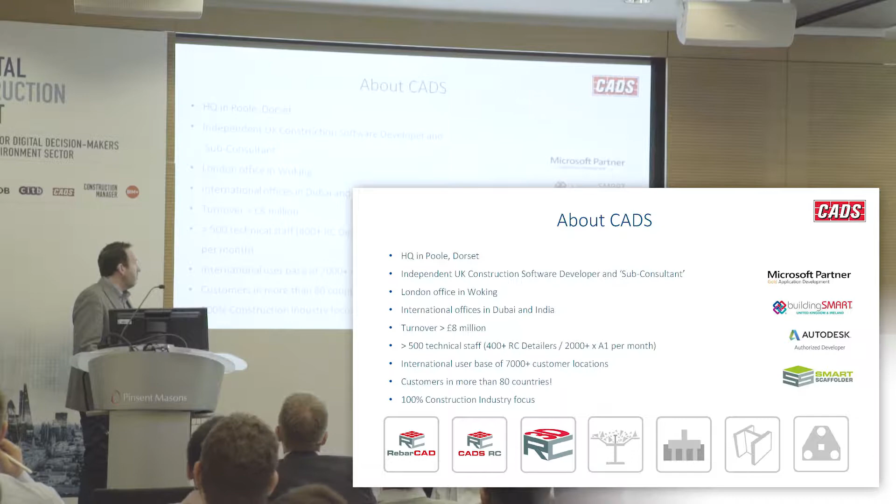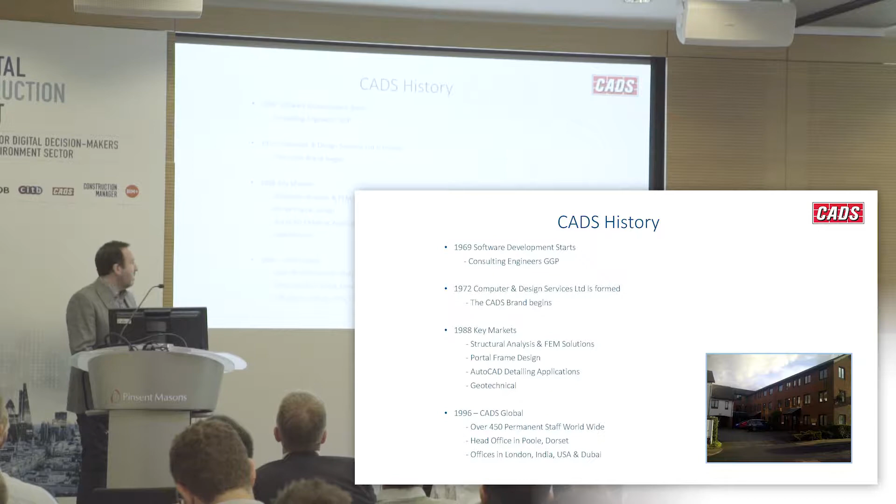We started in 1969. In 1996, we went global, so we've got offices in London, India, USA and Dubai. USA is one of our biggest areas as well.

Software solutions - we started off as a software provider, so a lot of these things are for engineering, civil and structural use. SMART Engineer is like a desktop calculation package for individual designs. A3D MAX does 3D analysis, first order, second order analysis, P-Delta, and a lot of other tools that we look at.

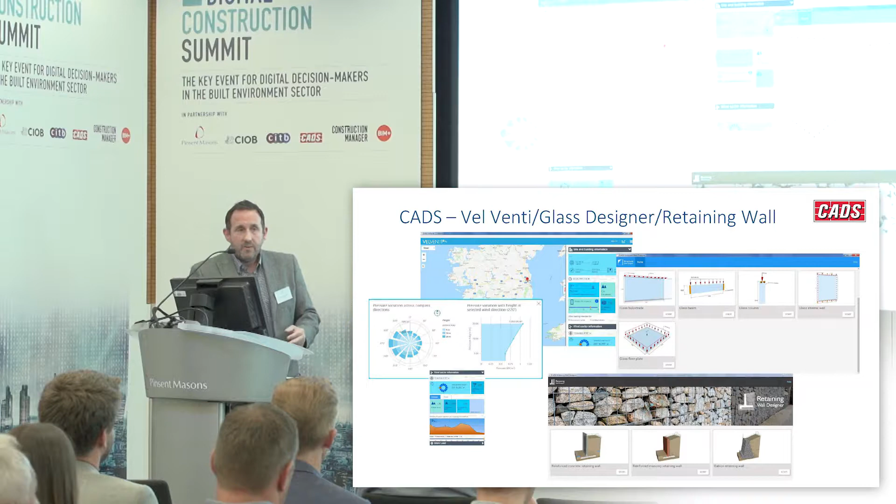We're even moving into more app-based products now, so we're continuing to develop apps. We've got retaining wall designers, glass designer, a new Vel Venti wind designer. So we're actually still advancing our offerings for the market.

We work with a lot of manufacturers - you can see we've got a few there that link into our products. Again, the emphasis for us is to make sure that in a digital environment we're including these people and getting that information into our products.

We also have partnerships, which is very critical for digital construction. The one partnership we've got at the moment is with Dlubal - sorry, I can't even say it. The idea, especially with digital engineering, is linking BIM models to analysis. You run analysis models and the information comes back into the BIM model. We've spoken about this disjointed method today, where a BIM model and something else come in separately. Now analytical models are being linked into Revit models, so all the information's in one place. We're even coming up with solutions to work within that BIM model for structural engineering.

This covers timber frames, CLT panels, glass and aluminium design. So everything you can design can be put into this platform, then transferred into a BIM model. These partnerships are critical for us.

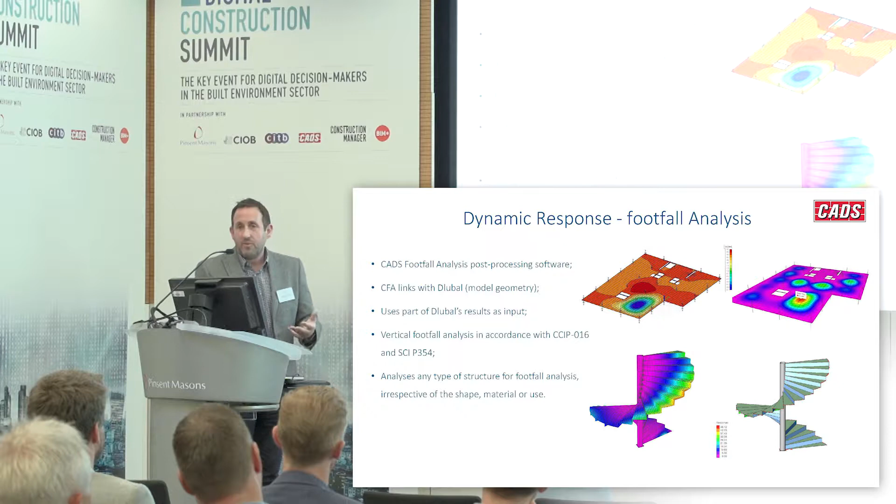Nonlinear analysis might be lost on a lot of people. One big thing here is CADS' footfall analysis. We're even developing things now to add into these third-party packages. We specialise in this, so we've said, look, you can use this in your own work. Footfall is becoming more critical now, even for things such as stairs, so designing for footfall analysis.

It used to be just for bridges, but now it's coming into hospitals too - it's becoming more about response factors. Again, a lot of standard products and projects you can work with, FE analysis and these sorts of things. One of the main products for CADS is CADS RC.

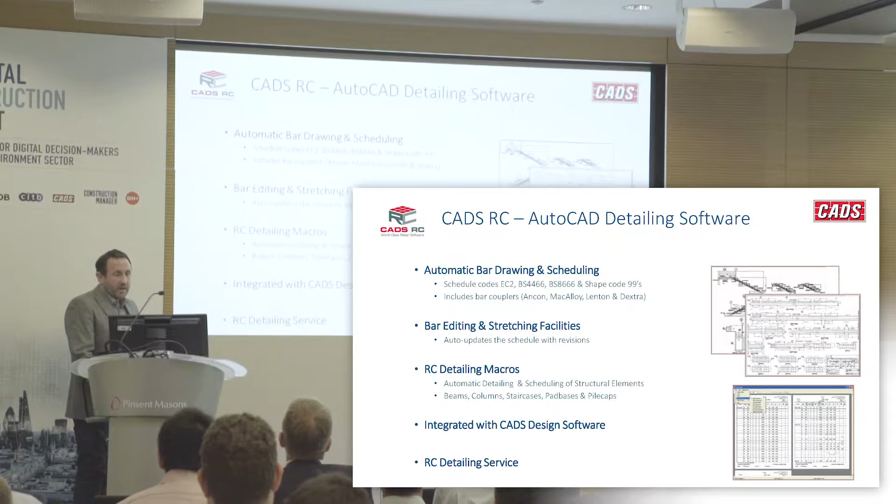This is an AutoCAD-based platform, and what this really did was take 2D drawing to the next level. AutoCAD's great - the best thing about AutoCAD is you can draw anything. The worst thing about AutoCAD is you can draw anything. So the idea was to start putting macros into the drawing environment with design parameters, but the idea is to pull information out. We can even start to design to codes within AutoCAD.

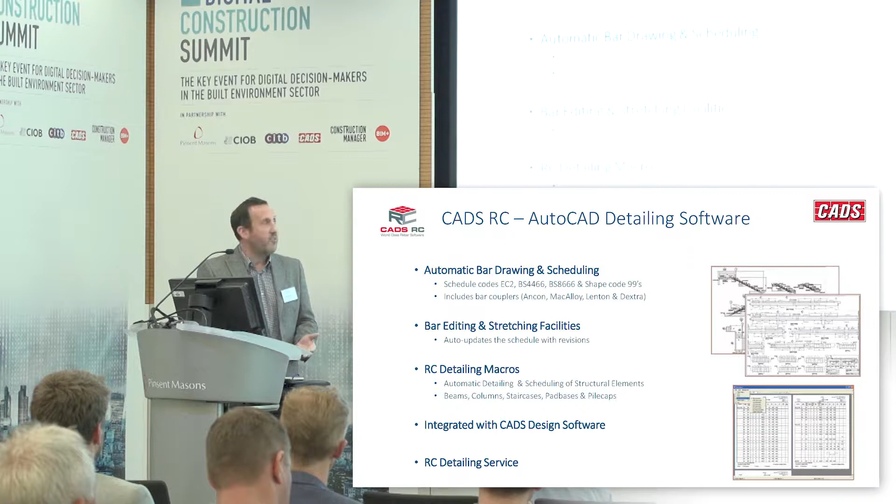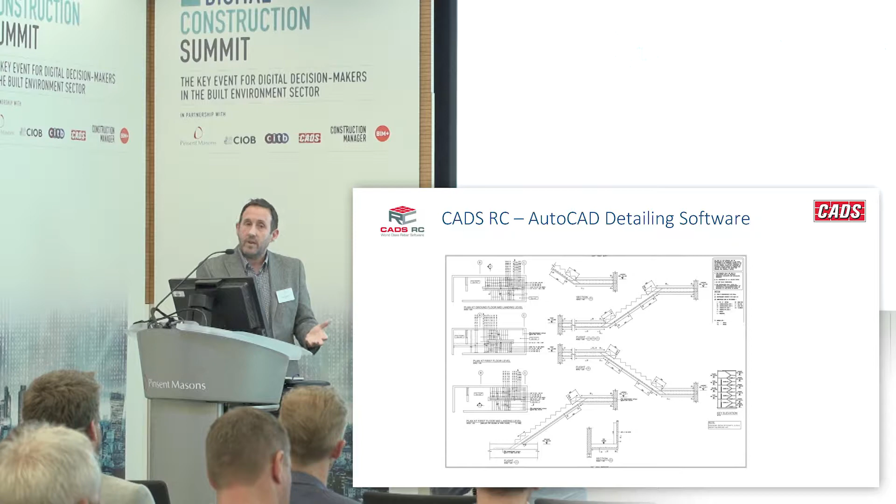AutoCAD isn't intelligent - a line's just got a length, after that it's got a line style. So by building these macros into the software, and with all this information, it allowed us to drive forward. These are the sort of drawings you can produce - automated drawings. You move something here, the schedule updates. This is in AutoCAD, so again it's this automated processing that a lot of BIM requires.

We've even now moved on to CADS RC 3D for Revit, so again we're bringing that technology, that information and that process into a 3D environment.

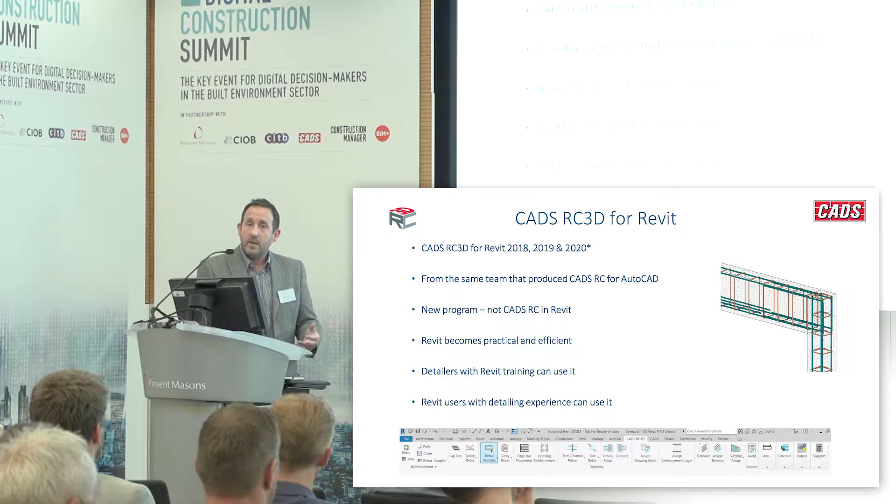Now, the idea of this isn't new to Revit. Revit can put reinforcement in, but if you ask a lot of people in the industry, do you use Revit for reinforcement? They'll say no. I say, why? It's just because it doesn't give us the tools we need. So what we've done is provide the tools you need to come up with solutions.

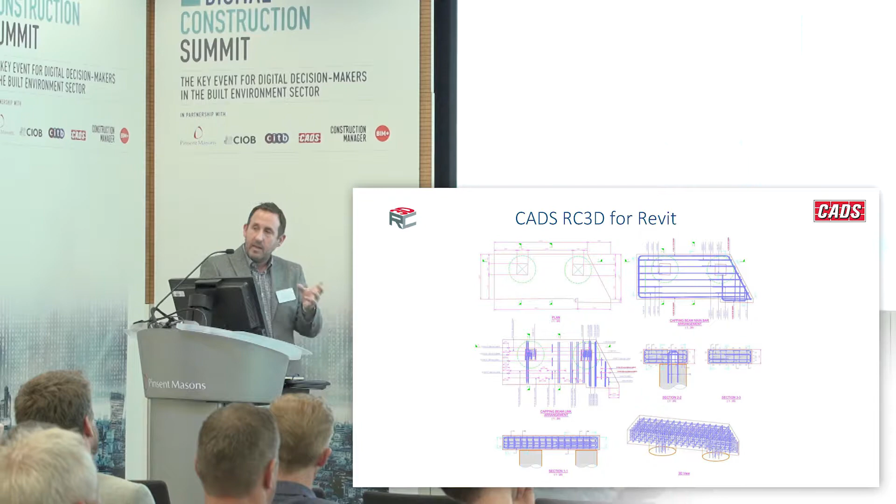And again, as you can see, standard BIM model, these are the sort of things that we were talking about earlier with Alistair and linking into BIM projects and all these sorts of things. But one of the main things we do is outsourcing. Clients will come to us. We've got a lot of big clients who are working on a lot of big projects in London, and they will come to us and say, we're working on a BIM project now. We used to use you for 2D drawings, but now we're taking the step into BIM. Can you provide us with this?

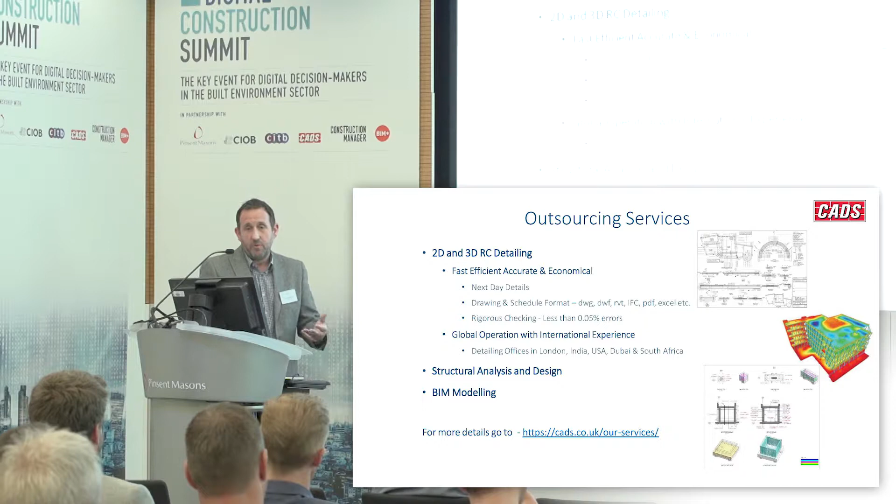So as a company, we've had to evolve and develop new ways of working to actually meet our client demand. So my standpoint today is really coming from a third-party standpoint. What have we had to do differently to meet digital construction, DfMA? So it's these sorts of things.

Reinforced concrete is obviously 2D design, and it says there 78% still produce 2D drawings. Problem with a 2D drawing, if you're not using CADS RC, is it's just a line. You can't get any information from it. BIM is about the I, it's information. What information is involved in that rebar?

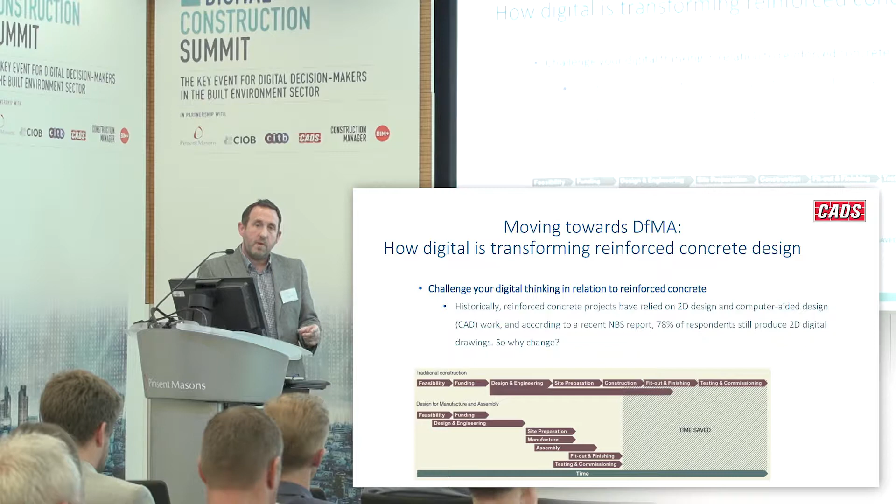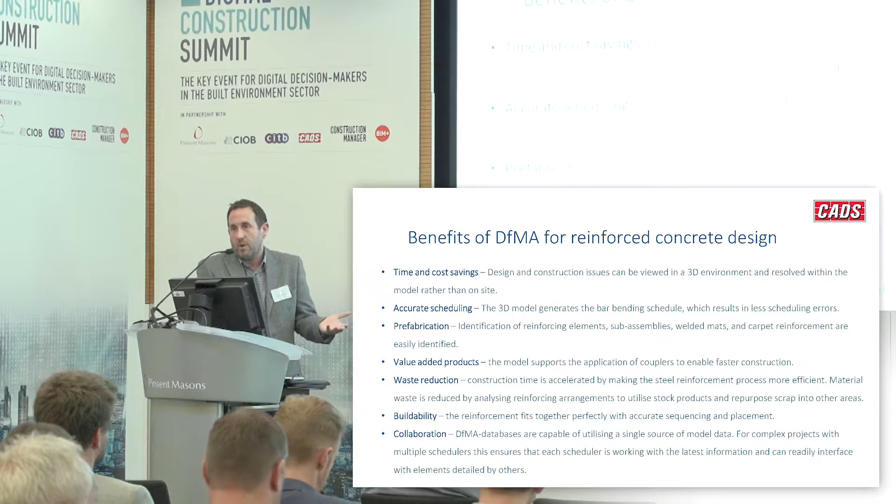Prefabrication, again, we'll show this in a minute. Value added products, so we can actually include manufacturers' couplers into the product to enable connections quicker on site. And waste reduction, a bit of a difficult one there, but with waste reduction, the idea is to cut steel if you're cutting on site and use it elsewhere. So again, you wouldn't know otherwise. You just have to take a guess at it.

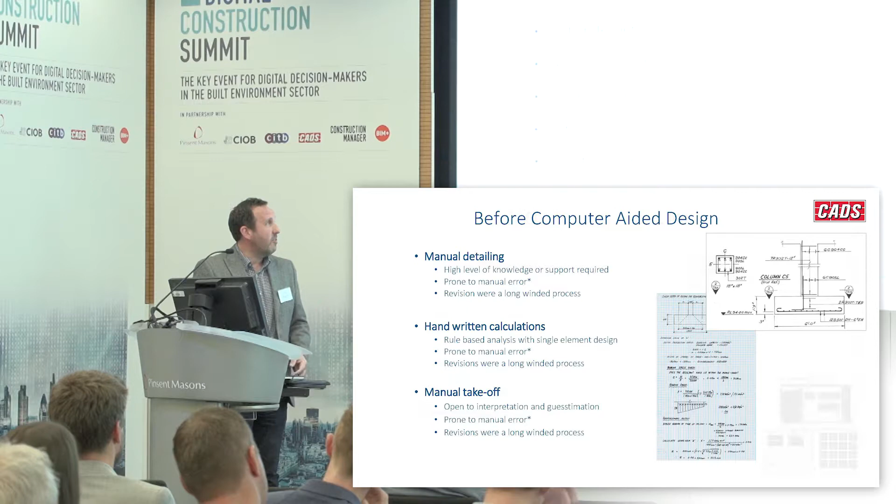So before computer-aided design, we have manual detailing. Now I've just put a little asterisk next to these, prone to manual error if you're doing standard drawing, and the reason for it is the argument that, and probably many of you never drew on a drawing board, if you did, you probably took more time on a drawing board. With computer-aided design, it's easy to draw something and then move it afterwards. But the idea of this is all manual. Revisions, long-winded process, open to interpretation, guesswork, standard rules. So again, doesn't lend itself well to modern methods of construction.

So when we start to look at CADS RC for 2D, the idea of this is accurate bar bending schedules. You change something, it'll revise the bar bending schedule. It's automating a 2D process. It is linked to BIM in some platforms with level 2, as long as the digital, even if it's a 2D drawing, is called out and then linked back in. So it's got a circle of references. It can be classed as level 2 BIM.

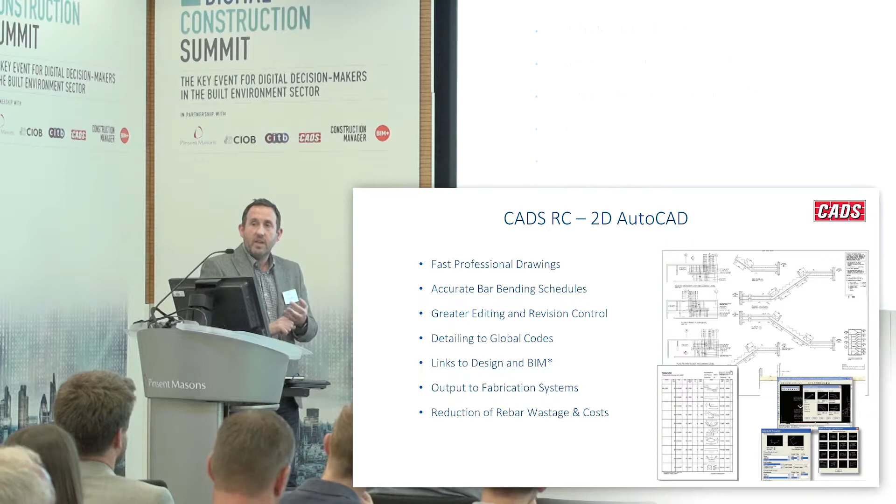Output to fabrication systems. This is the big one. The idea of this really is in that CAD drawing using CADS RC with that schedule, it's got a length. Every bar has got a length and a number and a quantity. The idea of that then, it can be sent straight to machining. Machines then can cut the bars to length based on that schedule.

It comes straight out the software, straight into the factory. It's in a data file, a CSV file. There's lots of different sorts of platforms we use. They can be cut and bundled with tags. They know where on site they're going. You can even put GPS coordinates if you wanted onto the elements, so they know where to put them on site. And it also lends itself to other fabrication methods, roll-out mats. So again, this can all be done in a manufacturing process.

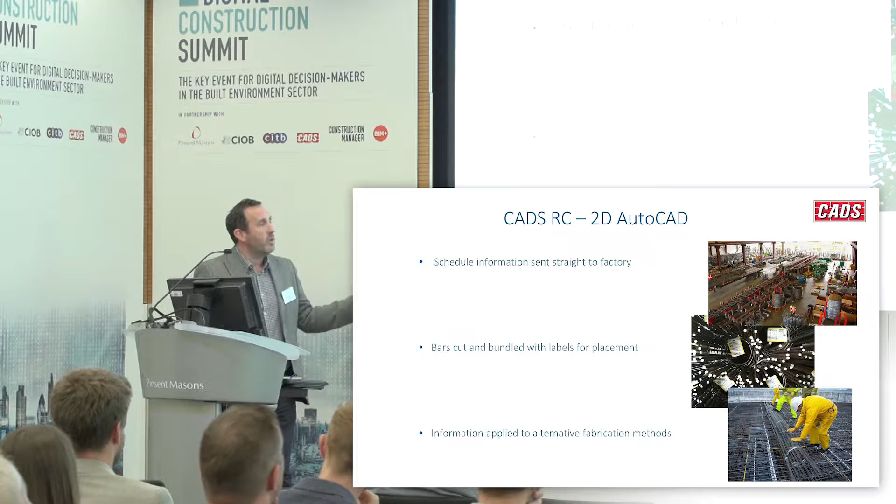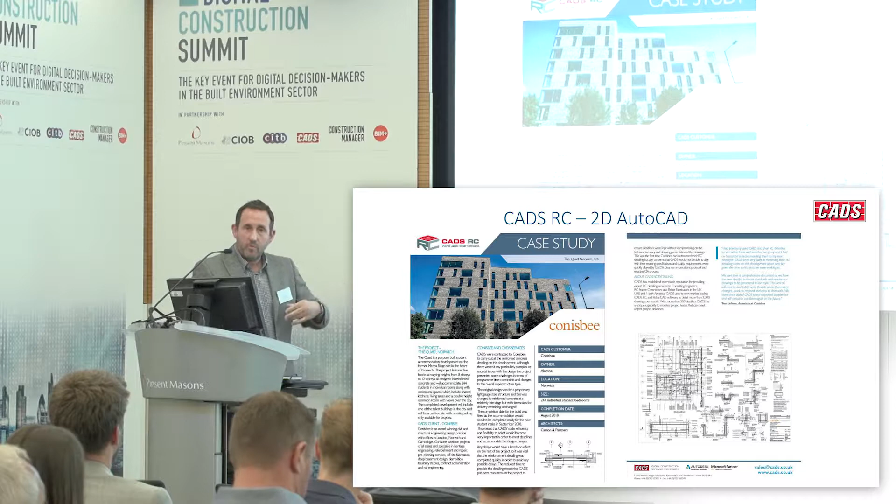Now this is still 2D. So again, with that CADS RC putting the information into the elements, we can call it all back out into manufacturing. We've got a simple case study. I'm not going to go over it too much, but the idea here is at the last minute the client changed from light gauge steel over to concrete. They still had to meet the schedule. We had enough resources to put it all on, 400 drawings created, and it delivered on time. So we've got those sorts of resources. Any changes were automatically updated, so we could actually manage and run the project.

Now, when we come to 3D Revit modelling, this is really where BIM and digital construction comes in. The idea here then is that we're working with the client's Revit model. They will send us their model. It's a digital model that we will pick up. We will then detail it, design it, do whatever we need to do to it, create schedules. We can then link it to design. So again, that partnership with Robot, we can actually send it out to that, do the analysis, bring it back. It can do minimum requirements for area of steel. So we can do all these checks before we even get to site.

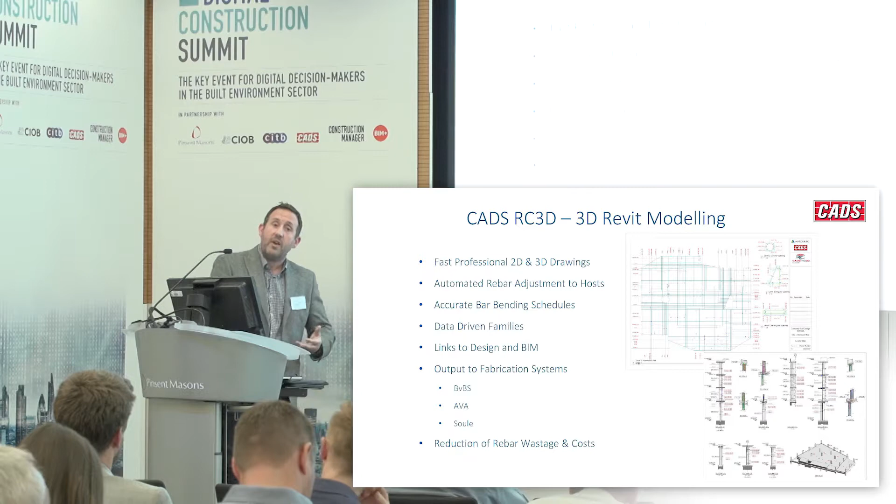We can also output to these fabrication systems we saw earlier. And again, obviously, we're going to reduce rebar wastage and costs. So again, that sort of lends itself to the side there. It's 60% saving on wastage and costs on site. From that then, these can accurately be sent into fabrication factories. We can put lifting eyes in the correct locations, make sure the stresses aren't going to be too much, straight from the 3D model. Any changes update schedules, and that then gets sent to the production line.

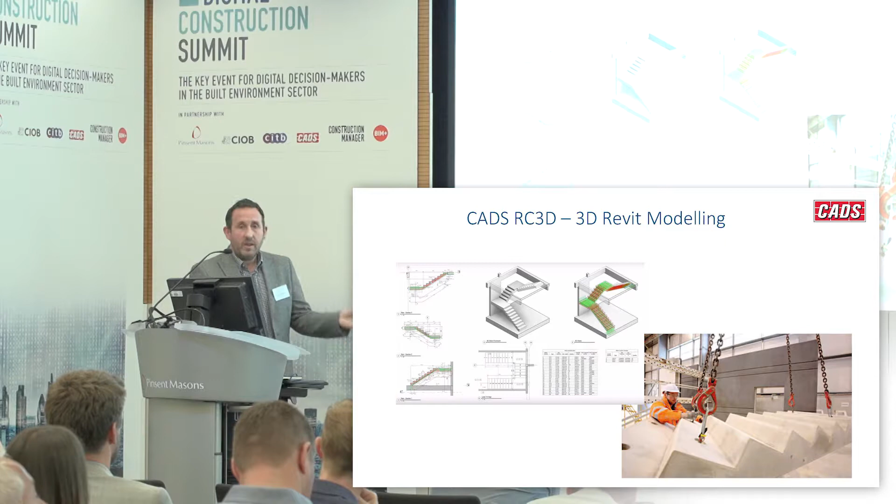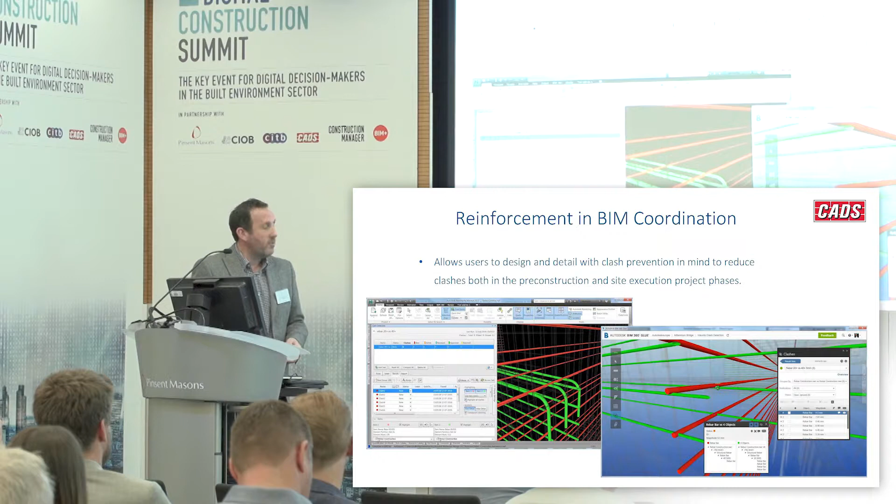Reinforcement in BIM coordination. So this is a big thing. This is where a lot of our larger clients wanted our models. With 2D, you can't do this. So in a 3D environment, we can start to look at rebar, how we place it, where we place it. Will it clash with something else? Will the bars actually fit? It's a coarse industry in the fact that you might go to site and see a guy with a crowbar moving things into place. That's great if it's touching each other. But if there's a base plate that's coming through and hitting it, will it cause a problem once it's set? These sort of things are what we're going to look at.

What it also does, it lends itself for digital construction in coordination. So this is BIM 360. Somebody can pick it up straight away and review it on an iPad on the way home. That's a Surface Book. They can actually do it on a phone, get your model, we've uploaded it. Oh, I want to have a look at it. Yeah, we're not going to use those couplers on this job. That then is automatically portrayed back into the model.

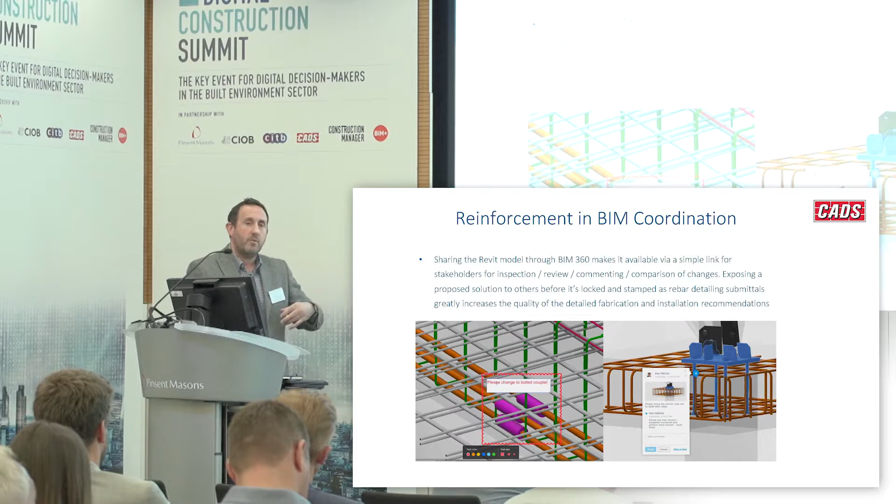Now, this is the information that our design service are having to do. We could be working on a huge project and the guy sat over in the UK could pick it up, look at it, mark that up. The guy in India picks up the model, looks at it, says, okay, that's the note, we'll change that. All on that model. Without having paperwork, the digital trail can be tracked. So it goes back, we know we've sent it. So we can sort of get around these.

These are a couple of videos, and I think the second one takes way too long, but the idea of them is that the first one is with an iPad, and he looks around with the iPad, and it's the model on an iPad, sort of a hollow view, and sees where a pipe's coming through to see if it'll work.

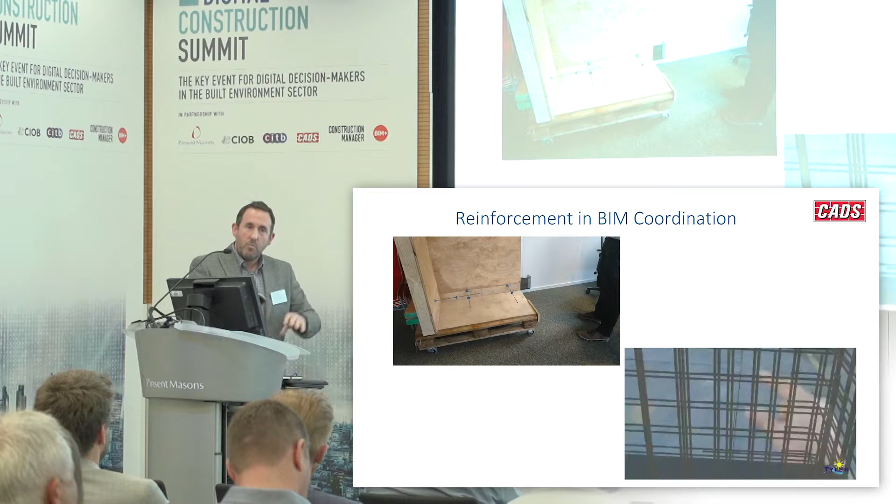The second one is just placed on site to see if it clashes with anything. And what it is is a site compound, so where they've got to move things because they're already seeing the next stage of delivery of rebar to site.

So, tools for coordination. Now, as a software house, we've had to step our game up by creating these 3D tools. The 3D tools in Revit were really for us as a company to use. We use them for our design service. But then people started to say, will you make them commercial? Can we use them? So what we've even started to do now, again, with this link to analysis, we've started bringing analysis results. We've even created built-in tools now to mark up areas, what we call schematic reinforcement.

So an engineer would usually pick up an FE map, draw over it with marker pens, scan it back into a computer and send it over to a client. The idea of this is with very limited knowledge of Revit, an engineer can pick up an FE map of the moments or the reinforcement, or deflections in a slab, and place reinforcement without even having to go outside Revit. So it's all in one digital model. So all the information's in one place.

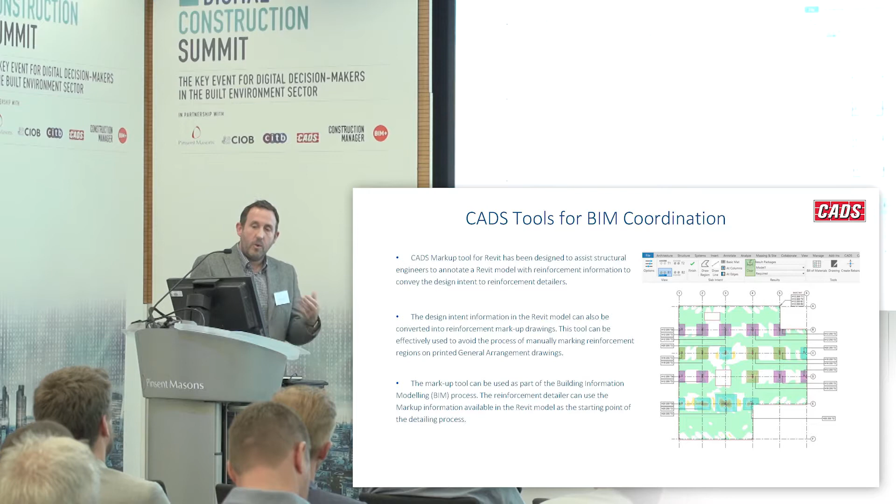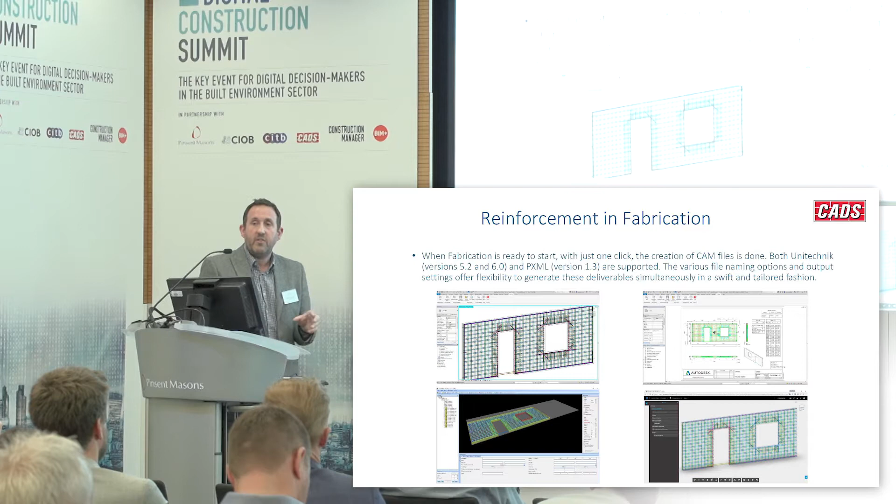So these are tools that we're creating ourselves to allow this process to be automated and in one part. We're even to the point now where within Revit, we can use our tools to place rebar. From rebar then, we've got automated drawings, these assembly drawings. Those assembly drawings, using things such as PXML and Unitechnik, you can actually then take out to a manufacturing slab. So again, this is manufactured off-site. And the last image there is actually, again, BIM 360, somebody investigating the whole thing. And that's all just from the Revit model, one model.

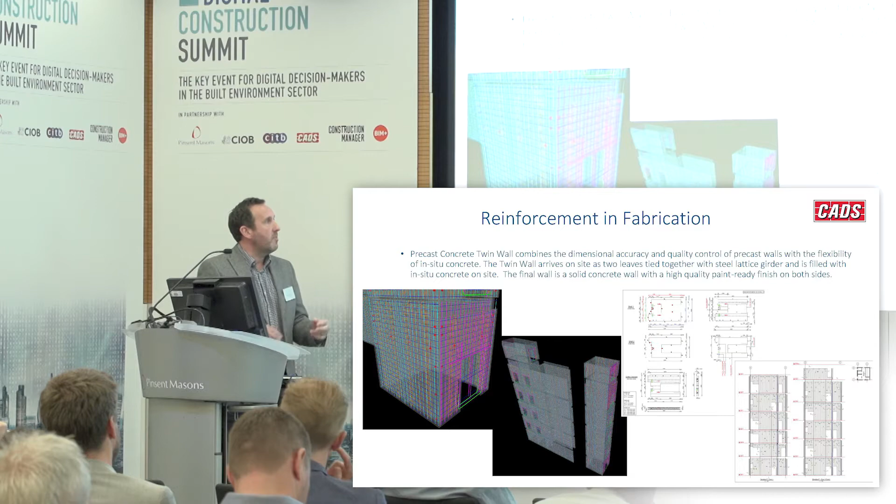We've even gone into, can't say the name of the company, but we work very close, and we've even developed tools within Revit for Twinwall. So these are two concrete leaves that are held together with a lattice, and then concrete gets poured on site. It's all done off-site, again, assembly drawings, lifting eyes, rod eyes, and all these sorts of things. So this is all what we've done to try and bring everything together and do everything within one environment.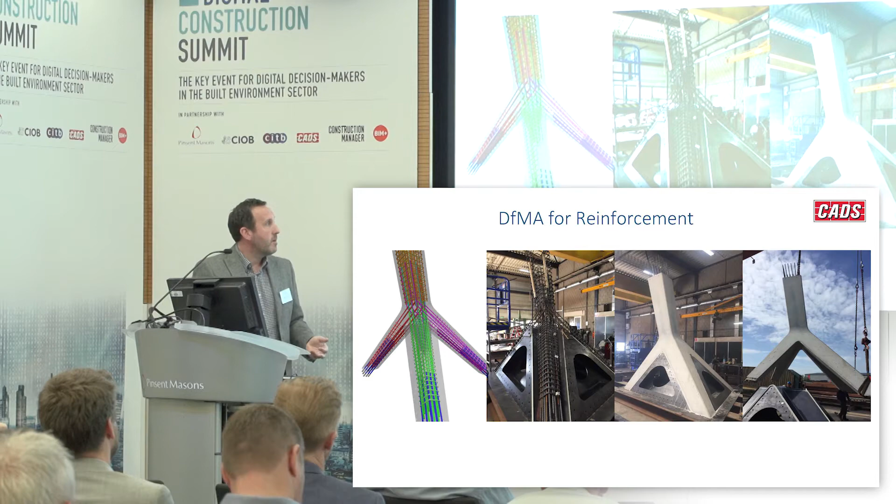Now, this is where we're looking at how we're moving forward. So you've got your Revit model with all the rebar. The steelwork underneath was created in Inventor, and all they did was say fill underneath and created a shape that was CNC machined and folded in situ, cast, and then lifted on site. So they say they saved about 3 months on site just from doing this within a controlled environment. And they used that for, I think it was, 4 bases.

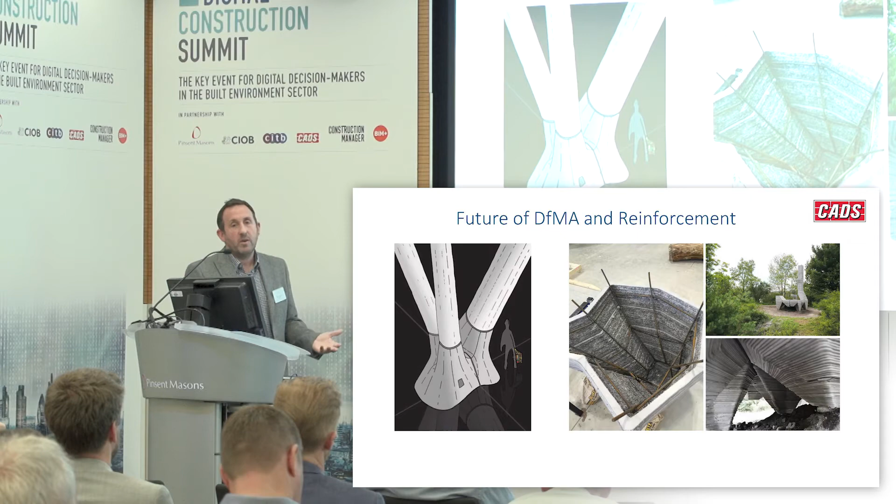Now, the future of where we are. So if we're looking at the future, SketchUp model, reinforcement done, could be automated, but the idea is it's a 3D printed reinforcement. So it lends itself to what we were talking about, 3D printed concrete. So these sorts of practices are taking place.

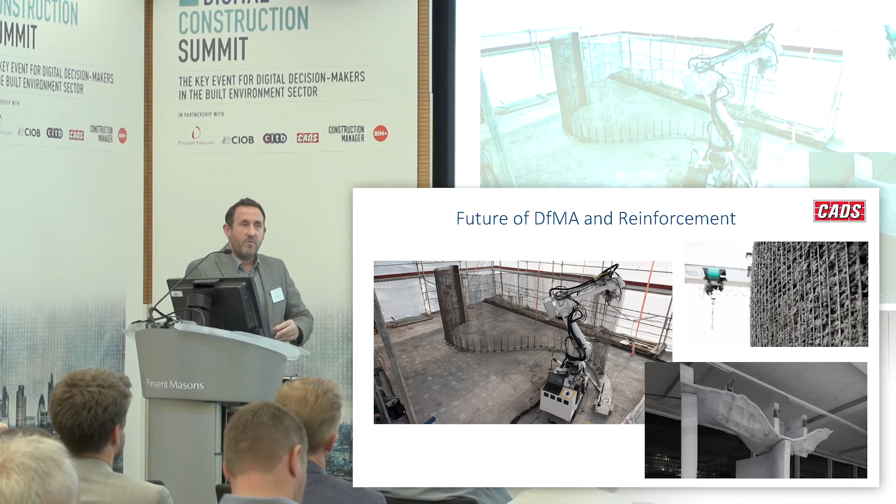I flew through it. We've caught up. We might even make lunch.

1:45. Okay, so like I said, it links loosely to what we're going through today, but the idea is to show how we've had to adapt to meet our clients' need for digital construction. And we're finding we're doing more off-site manufacturing now, especially with prefabricated panels and twin walls and these sorts of things.